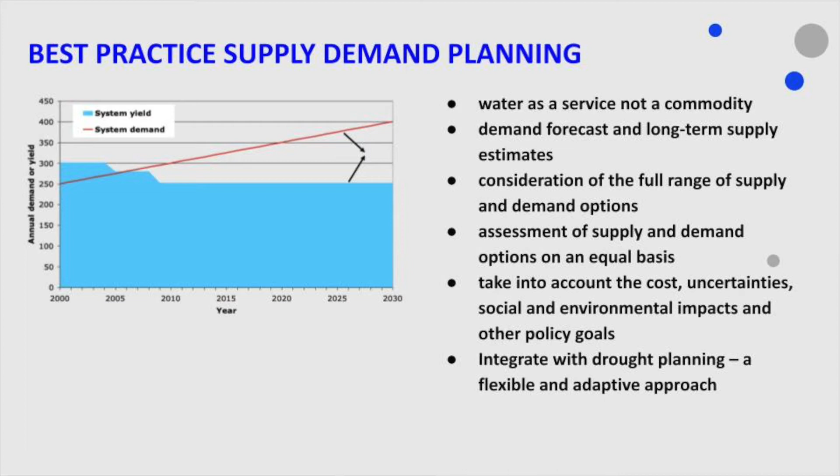The second thing is that we need to distinguish between drought or water security planning and long-term supply demand planning. So there's the average demand that will occur because of increase in population growth. And then there's the water security issues that arise because of a 1 in 100 year, 1 in 500 year drought. And both of these need to be planned for, but they need to be planned for in different ways.

So for improving drought security, we need to look at adaptive management options, those things which can be brought on quickly in order to respond to a drought. And for long-term supply demand planning, we need to look at the large-scale application of those initiatives which reduce demand or those which can increase supply in order to close the supply demand gap.

Water efficiency, in other words, saving water, reducing the demand for water permanently by structural means, is one of the largest, cheapest and quickest ways to meet the supply-demand gap in every single area that we've looked at around the world. And it's the quiet achiever. As you can see from this data from Sydney Water, it's one of the largest contributors to improving the supply-demand gap in Sydney, and it also comprises a lot of different options. This is the point of little things adding up to a lot, or pennies adding up to pounds.

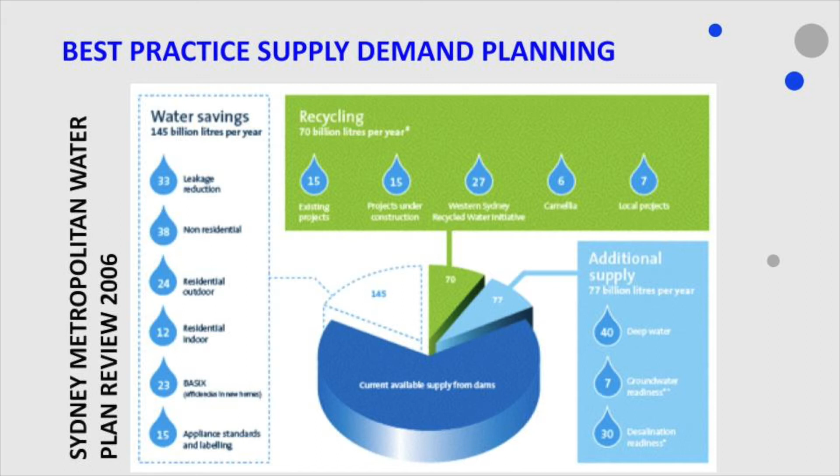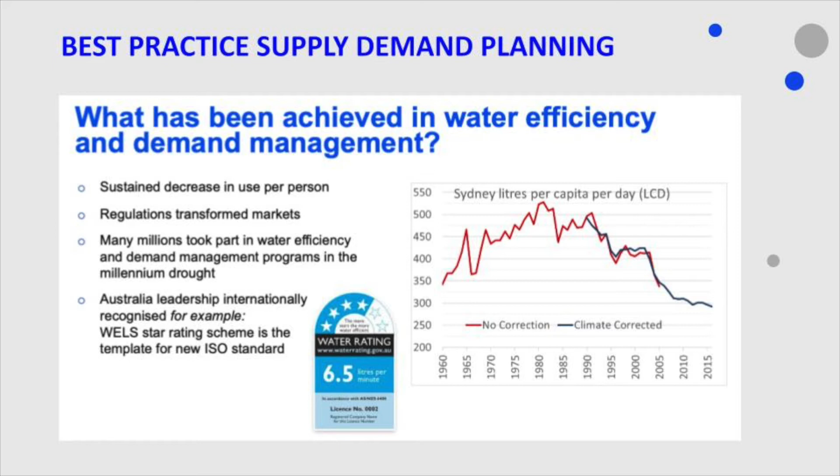So the improvement of water efficiency is something that should be explored, considered in much more detail. There remains significant potential in the North Coast region for this to operate. It's also the cheapest option. So whenever we've done the analysis in different cities and towns across Australia and internationally, we found that the unit cost of water savings, of improving water efficiency, is much, much lower than supplying water, whether that's through groundwater, through intercatchment transfers, through dams or desalination or potable reuse.

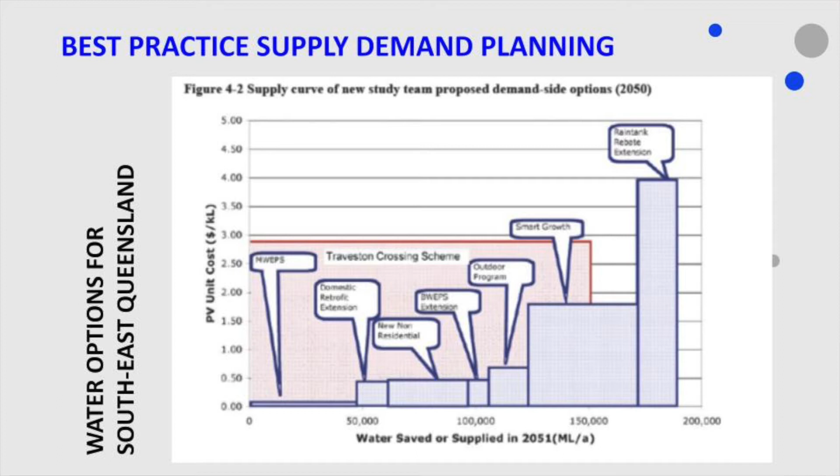It's the lowest cost option and it's the one that should be explored first, but it's often considered as an afterthought and it's often considered as being something that's not significant. So this is something that we really need to change in the analysis.

So we've seen in many cities and towns across Australia that, for example, in Sydney, 1 million people have been added to the population, and through the impact of a range of water saving measures, the demand has actually been kept flat. In other words, the per capita demand has significantly reduced, and we see the same occurring in other cities and towns across the world.

The potential for water efficiency can probably be made more concrete by looking at an individual end use. This principle can be applied to almost any end use, whether it's washing machines, cooling towers, urinals, and so on. But if we look at the humble flush toilet, then we note that in the early 1980s, the average flush volume of toilets was about 11 or 12 litres.

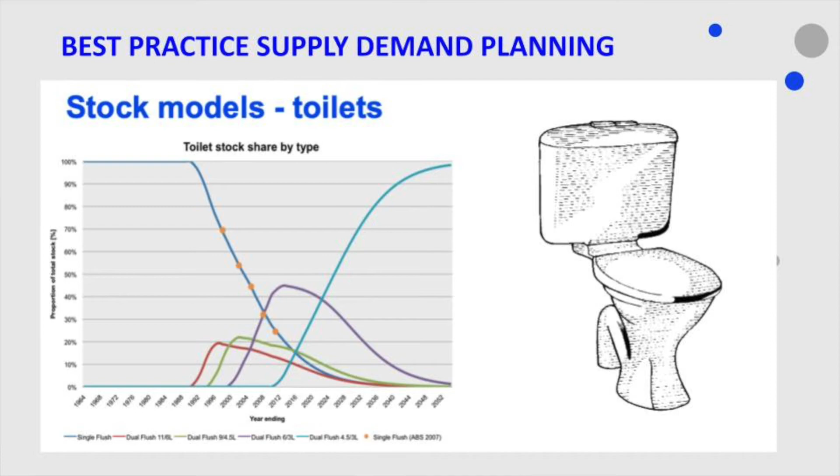With the invention of the dual flush toilet, this went down immediately to 11 litres and 6 litres, or probably an average of around 8. And now the current toilets have a dual flush type of 4.5, 3 litres, and in fact the average volume is less than 4 litres per flush. And that reduction has been absolutely significant, such that we will never in Australia use as much water flushing toilets as we did in the early 1990s.

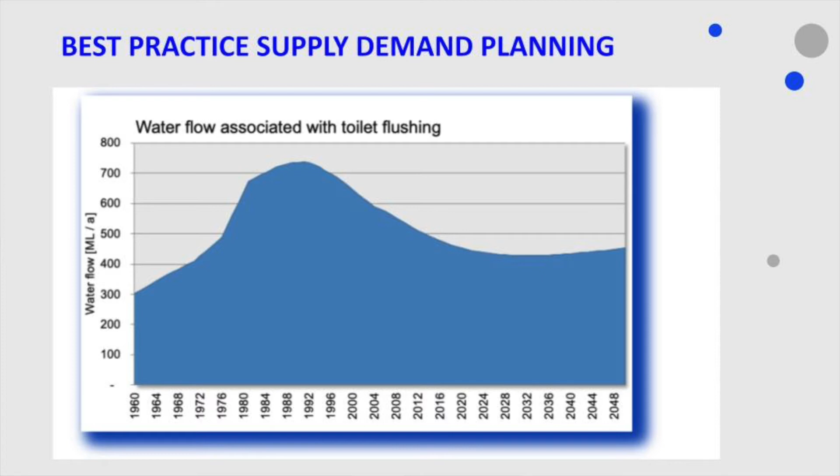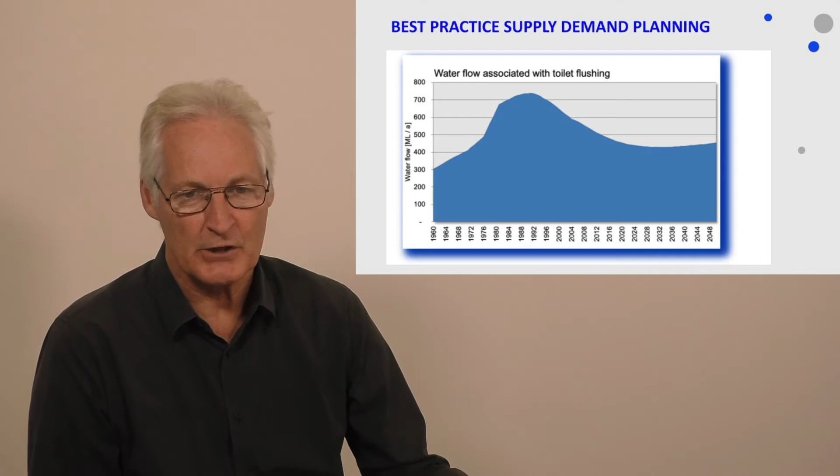And the technology continues to improve, and of course there are significant new innovations in the form of waterless urinals and similar. So this is just an illustration of what can be achieved, and if you then apply that to the front-loading washing machines, which on average use half of top-loading washing machines, and all other appliances, you can see the massive potential for improved water efficiency.

So the question for the Rous region is, to what extent have we achieved saturation of best practice water efficiency across all the different uses, including industrial uses, including system leakage and losses, including all of the appliances in hotels, motels and houses and shops and factories across the region. So this is the question: what is the conservation potential for the North Coast region?

I've talked a bit about the role of water efficiency in future urban water systems, and of course that will improve. It's the most significant potential that we have at the moment. But one of the questions we should ask is, what would future urban water and sewerage systems look like? We've actually inherited a system from over 100 years ago with conventional gravity sewers draining to a sewage treatment plant and then discharging either to rivers or to ocean.

But if we were to redesign the system, and if we were to look to the future for a more sustainable system, then we would probably look at a more distributed arrangement, so that we would reuse wastewater closer to the source. For example, we would separate out the pollutants before they get into the system to reduce costs and to maximise the potential for resource reuse and recovery.

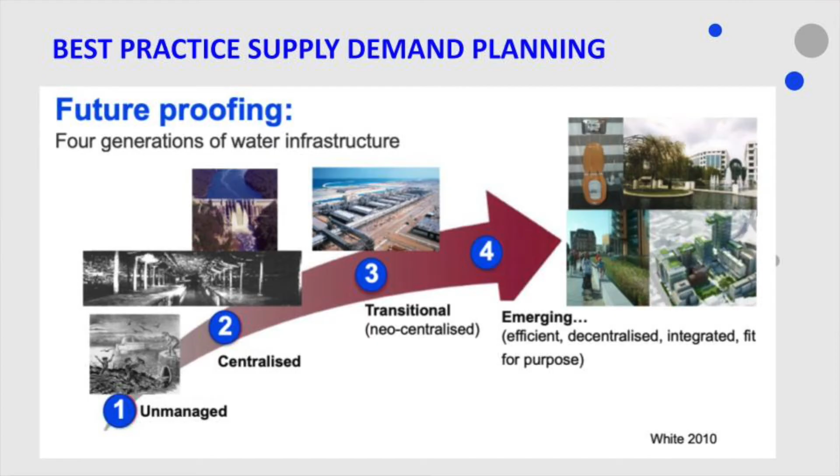We would also maximise all the different sources of water, whether it's rainwater, stormwater, wastewater, and use them for the best possible use available near where they're produced. And of course, we would maximise water efficiency. So this is a new, what we call fourth generation water system. There are many examples of that starting to occur.

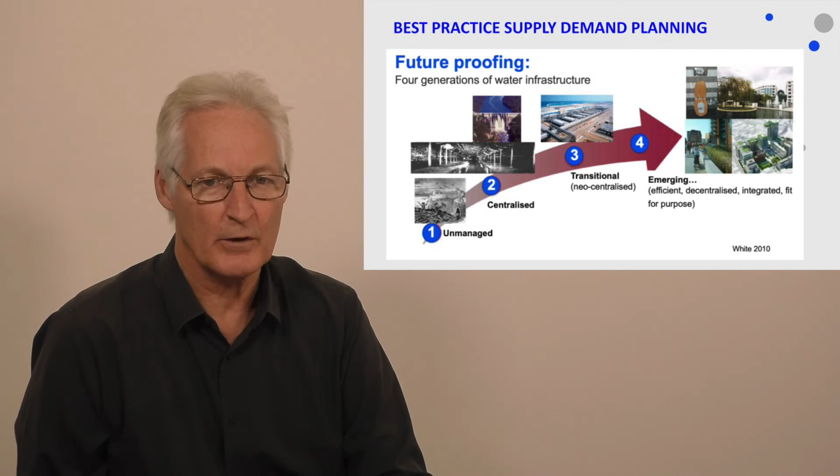For example, at our university, at UTS near Central Station, Central Park, or the precinct around Central Park, is supplied by water from a sewage treatment plant in the basement of the large tower building. So that's an example of the fourth generation water supply, and indeed that water comes over the road or under the road across to UTS and is used in cooling towers at UTS. So this is an example of the future of urban water systems, and we don't need to be stuck in the once through use and dispose system that we currently have.

I've had a close look at the proposal for the Dunoon Dam, and in my view, there are four main reasons why this dam should not be built and why alternative options should be explored. The first is that the level of service that is assumed, in other words, the rules regarding the frequency and duration of restrictions, have been changed without recourse to engaging the community.

It's really important that the community have a say in what is the appropriate level of service, what are the restriction rules, relative to the very high cost of a large dam in order to meet the supply-demand gap. That measure alone, changing the level of service or the restrictions back to what they were previously or to reasonable levels, would already significantly defer the need for the dam.

The second is that the impact and potential of water efficiency, improving the structural and permanent level of efficiency of water using equipment in the region, including system leakage and pressure management, has not been adequately considered. And judging by the research we've done in almost every jurisdiction across Australia, we know that there is significant potential for improved water efficiency to defer the need for augmentation.

Based on the work we've done across Australia in cities and towns and also internationally, I'll put forward a series of options at a high level, which would be quite suitable for the Rous region and build on the work that I previously did in the region. So the first of those is to understand more about what water is being used and how to manage it, and smart metering is an absolutely key part of this.

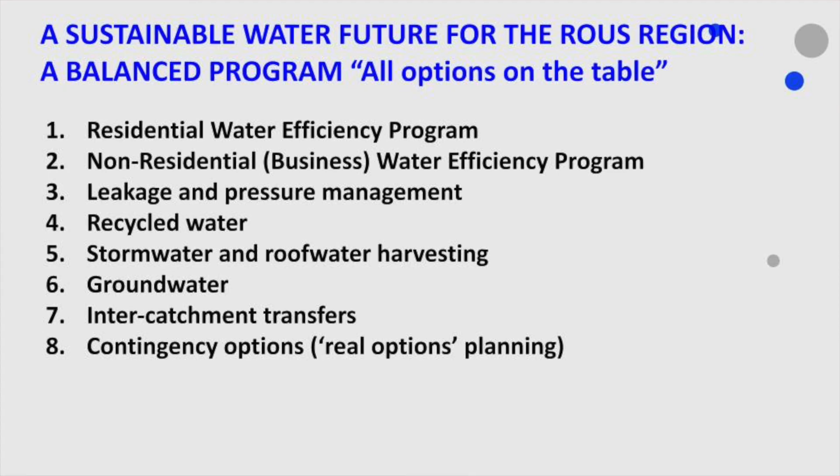Leakage and pressure management is absolutely crucial. There's significant potential. There is much lower expenditure on pressure and leakage management across the region. Some constituent councils are doing better than others, but there's huge potential there. And then customer side water efficiency. So making sure that wherever there is no best practice efficiency in place, that there are incentives and investment in order to ensure that happens.

This is a huge opportunity for the region to grow business, to reduce the cost of business, not just water costs, it's also energy costs and greenhouse emissions, because a lot of water is used as hot water, and if we save that, it reduces greenhouse gas emissions. So there is an opportunity to create a massive employment dividend with plumbers, engineers, irrigation, landscapers, a whole range of different trades.

Many more jobs will be created through a program of investment in water efficiency and in small-scale reuse and in leakage system losses and pressure management. So there is a huge opportunity for the region to put in place a comprehensive efficiency program which pays dividends across a range of different areas.

The second thing is to make sure that all of the options have been adequately considered. The opportunity for non-potable reuse in particular has not been explored in the region adequately. There are plenty of opportunities for industry and commercial premises and even residential premises for this.

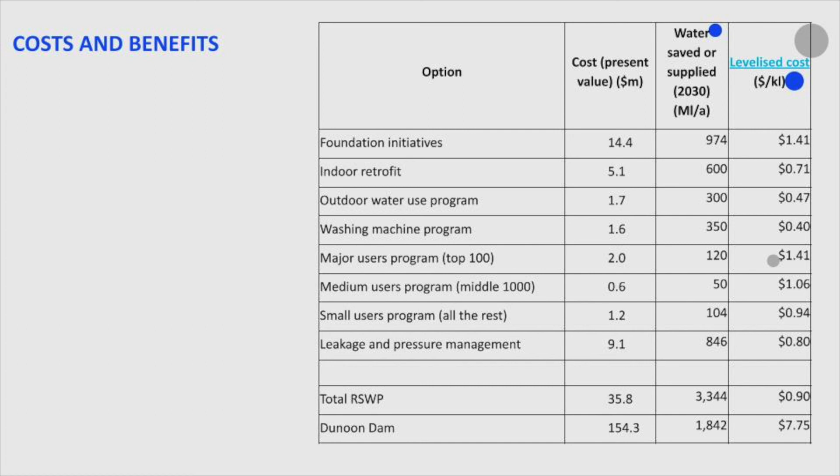The potential program which could form an alternative to Dunoon Dam, which includes water efficiency options, an education program, and reducing system losses and pressure management, would be significantly cheaper than the cost of Dunoon Dam and would push the requirement for new augmentation, whether it's Dunoon Dam or other water supply options, out past the planning horizon.

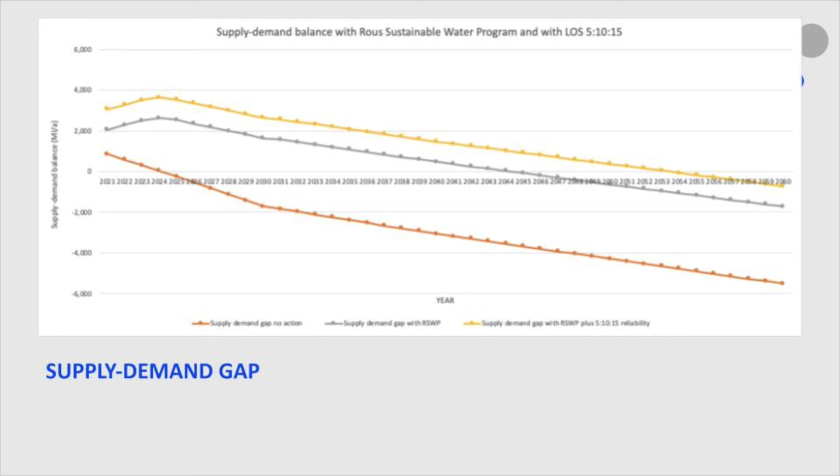So it would give plenty of breathing space, and it would put the region on the map in terms of being the most water smart region in Australia, creating employment along the way, creating opportunities for greenhouse gas reduction and for energy saving. So there are significant benefits associated with at least considering and doing the analysis to see what is possible in the region to become the most water smart region in Australia.